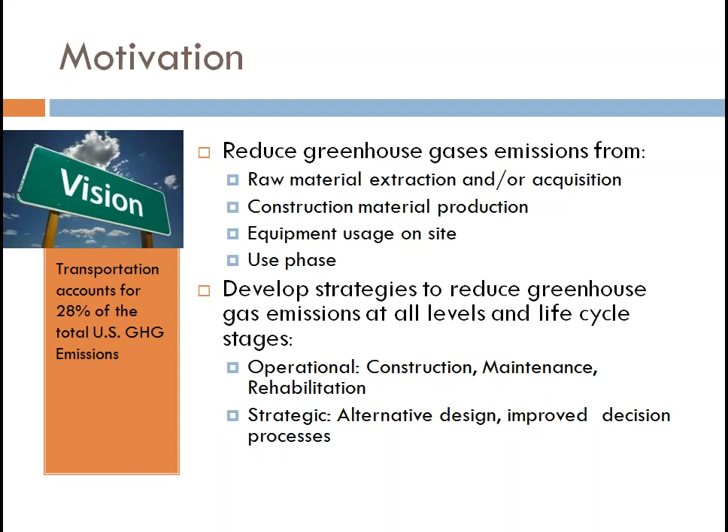One of the things I'll be talking about today is that building and maintaining smoother pavements is a good idea. Intuitively, that's because smoother pavements reduce fuel consumption. Personally, on your vehicle you may not notice a major difference, but given the entire fleet, the numbers add up very quickly.

Of course, there's the added benefit that it's a much more pleasant experience driving on a smoother pavement. So the question is, what do we know about pavement roughness and how does that relate to fuel consumption? And how do we tie that into some of our life cycle assessment work? So why smoother pavements?

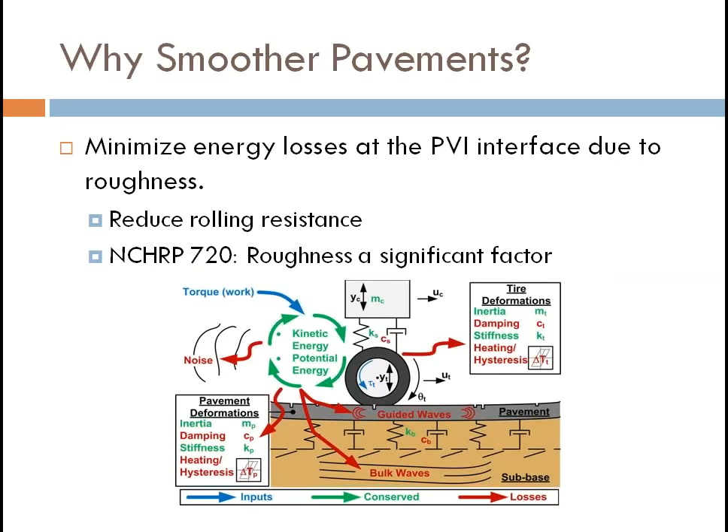We want to reduce rolling resistance. NCHRP 720, and quite a bit of work coming out of this university too, shows that roughness is definitely a significant factor. Pavement deflection and other areas where energy is lost at the pavement-vehicle interface exist too, but roughness is definitely one of the most significant factors.

Given that roughness is a significant factor, we use the IRI measure, the International Roughness Index, to measure roughness. Not all states use it, but most states are using it at this point, and Federal Highways is pushing for IRI to be used. It's measured in inches per mile or meters per kilometer.

One of the best parts of it is that it's generally an objective, measured quantity, and is reproducible. Now, I have to put in a caveat here: usually when I give a version of this talk, afterwards somebody says, I don't think you understand, we really don't know how to measure IRI. My response to that is, I hope you're working on it, because I don't care — what I'm working on is the stuff that you're producing.

So we tend to work with IRI data and draw our conclusions from it. If the IRI data isn't perfect, some of those imperfections will show up in our studies, and we recognize that as a limitation.

I think generally we know it's a reliable metric, partly because a lot of the IRI data is used to calibrate and validate various existing systems. So we don't look at it as an inherent absolute value, but more as an approximation for the pavement. There's the reality, and there are the trends, and the trends may reflect that reality, but we're not suggesting this is an exact measurement.

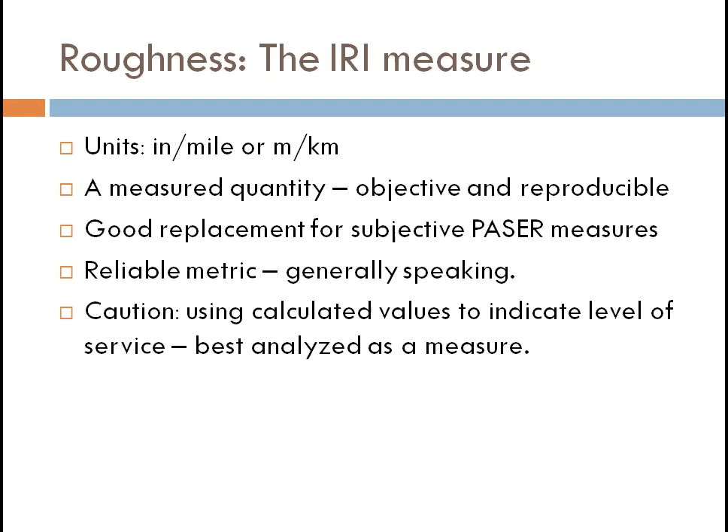When we're looking at greenhouse gas emissions during the use phase, it's a useful metric to estimate these emissions. In the context of use-phase emissions, we want to minimize pavement use-phase emissions, because we've seen in various studies, including some of our previous ones, that 88 to 90% of life cycle emissions happen during the use phase — that is, after a pavement has been commissioned, post-construction.

With respect to IRI, we know that a change of 2 meters per kilometer gives you a 1 to 2% reduction in fuel consumption. Again, strictly speaking, that's not a very big difference on your personal vehicle, but within the fleet, that translates into quite a significant difference.

So the challenge is how to estimate these use phase emissions, understanding that this is fundamentally a dynamic value we're looking at, because traffic changes over time, your pavement condition is deteriorating over time, and so we have to consider this as a time-dependent process.

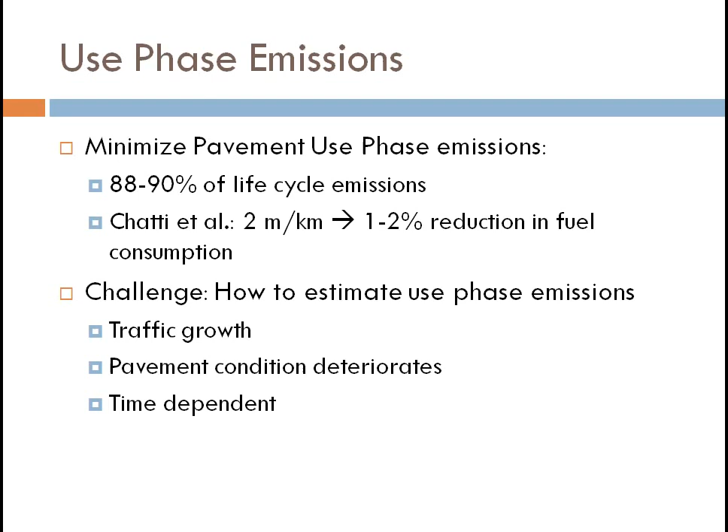Given that it's a time-dependent process, how do you associate and estimate these use phase emissions? The question really is, how does fuel consumption change over time as the pavement deteriorates? Not just how does fuel consumption change with IRI, but you have to look at that in the context of how it changes over time as the pavement is deteriorating.

What we wanted to do was first answer questions like: how does the IRI change over time? Because we use the IRI change over time as an approximation for pavement deterioration, which we're using to look at roughness. And also understand what conditions influence the IRI.

So are there relationships with pavement type? Are there certain trends we can see with pavement type? Regional factors - are we seeing these trends come up differently because of climatic differences? And traffic loading - what are the factors driving the relationship of IRI change over time?

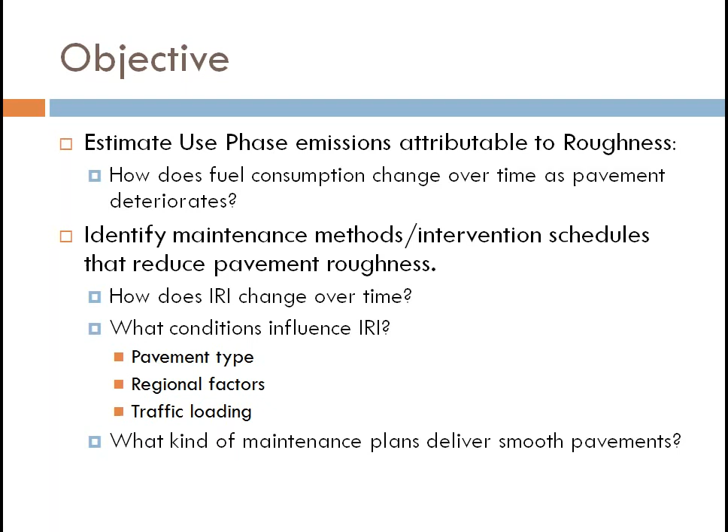And also, strictly speaking, based on the empirical data, what kind of maintenance plans help us deliver smoother pavements? So the fundamental question we're looking at is how does fuel consumption change over time?

We can write that as a simple differential rate of change of fuel consumption over time, and we can reduce that down to this simple product, which is the rate of change of fuel consumption as a function of roughness, multiplied by the rate of change of roughness over time.

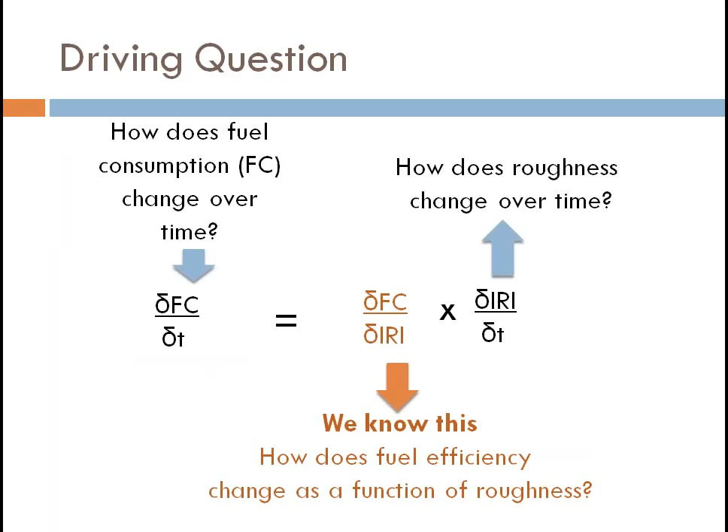When you do that, we find that the first part of the problem we have a good handle on, because we understand how fuel consumption changes with respect to IRI. How do we know that? This is out of Dr. Karim Chatti's work at Michigan State.

And of course, this also plays out for different speeds, which, as we know, the different speeds do make a difference. That's the basic assumption I should have mentioned earlier.

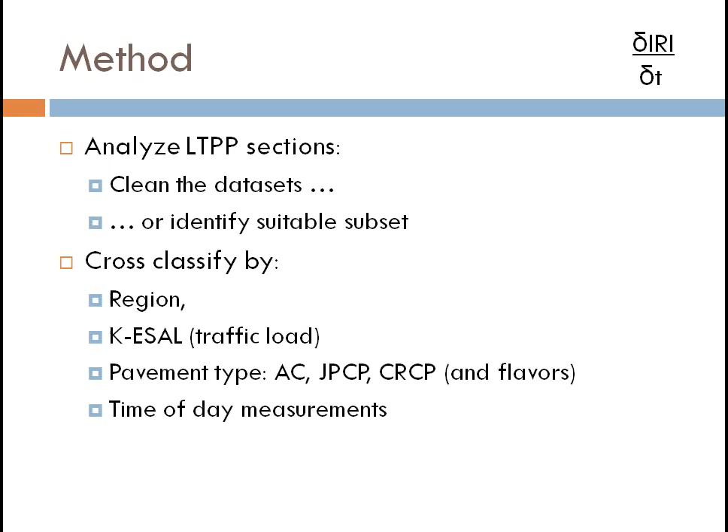So we said, why don't we start off with a data set that's already been used for some purpose, assume the validity of that data set, and build from there. We started off looking at what we call the pre-validated data set, the IRI data set that was used to calibrate the MEPDG IRI change models. We figured if that's been used, there's definitely some validity to it, so let's start off with that, and then see what differences we get as we apply the same test to the larger body of data. So we started working with that data set, subset.

Part of the reason is that for that particular subset, the model IRI calculations closely correlated with the observed IRI calculations from the LTPP database. This was a subset where, as I mentioned previously, there were concerns about the reliability of the IRI measure - but this was a fairly reliable data set to work with. And all results that I'll be reporting are at a 95% level of confidence for hypothesis testing.

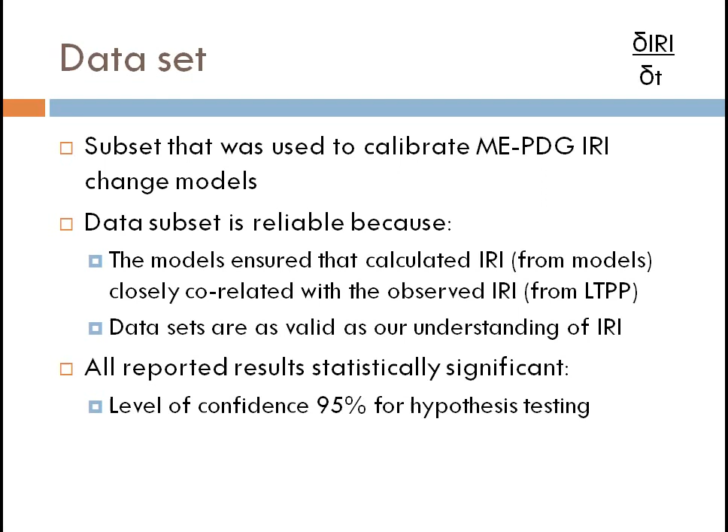Some of the complicating factors, as I was mentioning earlier, is that the LTPP data set spans about 20 years, early 90s data sets from then. So there are some sections that are very well documented in terms of the maintenance that has happened, and other sections that are not as well documented, probably because they rolled into the program at some point later on, or fell off the program at some point. For some reason or another, there are places where you clearly see changes in IRI with no maintenance or construction having been done. So we had to go through a cleaning process to take some of those sections out.

The other concern is that the LTPP database has all these different studies, and each study's pavements were done for various different reasons. The reason the sections are in the database was often to measure other issues, but the IRI was also measured for it. That is a concern, but as I mentioned earlier, if the IRI was measured, well, the IRI was measured, and IRI is IRI. So there might be some confounding factors because there might have been special case sections put in.

The response to that is that, generally speaking, we're not suggesting you take this as gospel truth, but look at it as, given a large data set, what can we do with it? Then take the conversation to the next step: what other large data sets do we have with this kind of infrastructure data that we can start filling in and use the same approach?

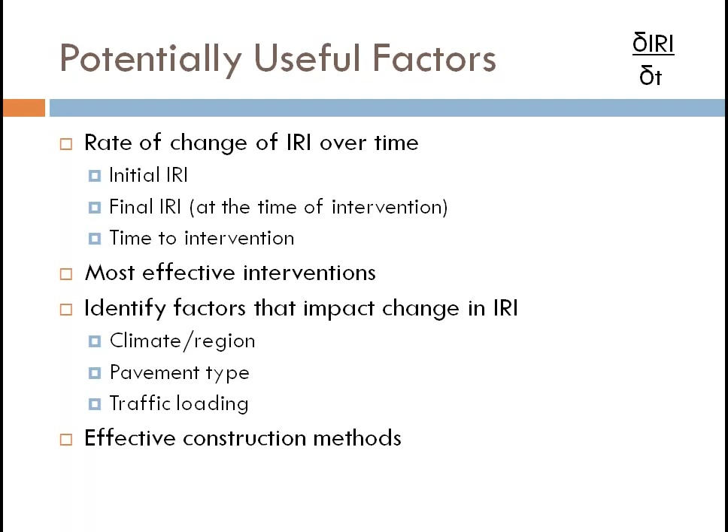Using those three numbers, we thought we could identify the factors that affect the change of IRI over time - looking at initial IRI, time to first intervention, and the IRI at the point of intervention. So the question was, let's look at region, climate, pavement type, traffic loading, throw all these numbers out there and see what we get.

As I pointed out, this is a fairly noisy database. So what we were looking for is whether there are any trends that come through irrespective of the data subset we're using to analyze, or the question we're asking of the data. The one general trend that came through across all the different subsets and questions is that asphalt, the AC pavements, tend to have a lower initial IRI, but a faster degradation rate.

If you look by region, we're seeing a similar pattern in pretty much every region. There are parts of North Central where it goes the other way, but those sections we later traced back to having very specific problems. Generally speaking, from that you could also understand what the first intervention years were. Typically in the southern region, and interestingly also north central, you're going between 15 to 16 years, whereas in the North Atlantic and western region, you're looking at 10.8 to 11.8 years.

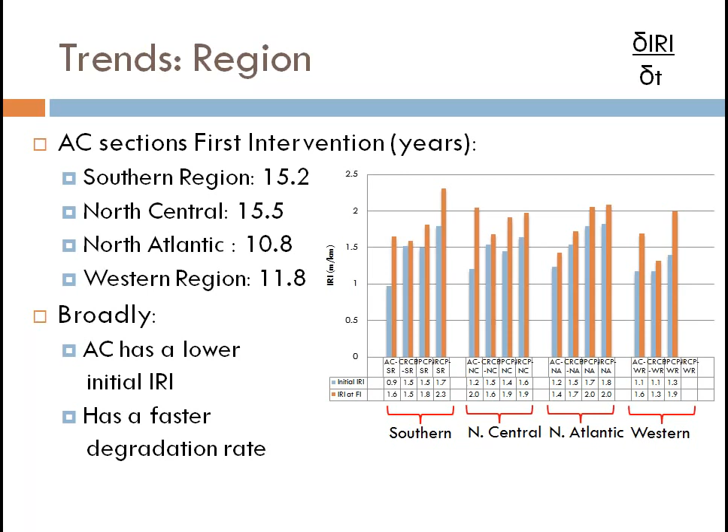We also flipped it and looked at freeze-thaw behavior, and found that wet freeze, dry freeze, and completely dry regions fall out pretty well along those same numbers - generally between 15 to 16 years in some regions and between 10 and 11 in others. Then looking at trends by base type, with asphalt pavements you're seeing a lower initial IRI for treated bases than for untreated bases, and this is not unexpected.

Concrete pavements, even though we hear that DOTs are looking at using more stabilized bases, we're finding that in terms of the data we have, we didn't find any major sensitivity there.

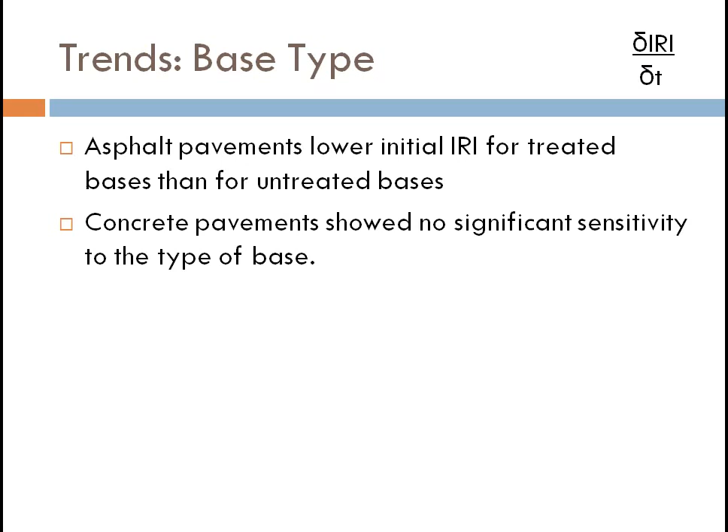Effective interventions we looked at, of course, and some of these are expected - you're finding major reductions in IRI between 20 to 30% for joint repairs, slab replacement, surface grinding, and different kinds of surface treatments. They reduce your IRI by 20 to 40%.

Now, what are the sequences that work best? Again, we're getting into a situation where the data is not probably the best to answer that question, right?

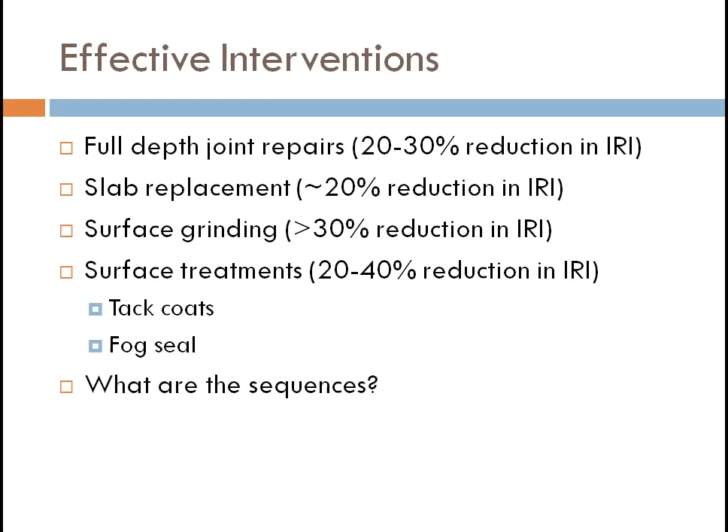So the general lessons from analysis, when you look at it through the many different subsets that we analyze - and I'm not getting into all the details here - is that the one common signal that comes across is, generally speaking, the asphalt pavements tend to have a lower initial IRI, but in the long run their rate of change is steeper than for concrete pavements.

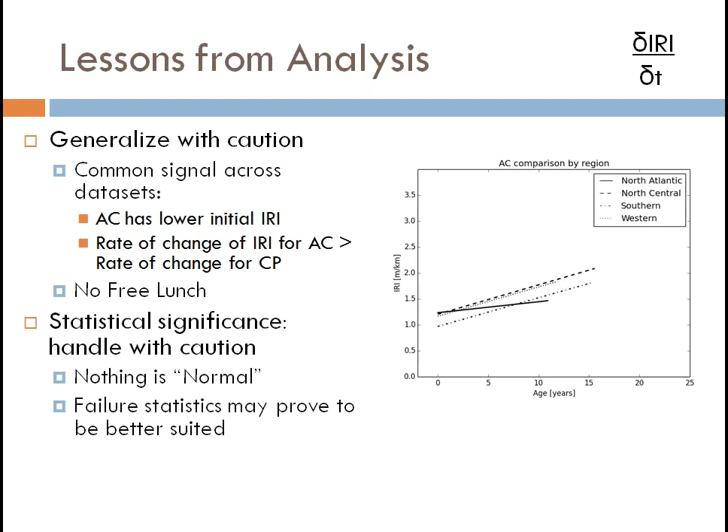But this general slope between the AC and the jointed plain, you're finding those slopes coming out to be pretty consistent, and despite the noisiness of the data, it doesn't matter which subset you're using, you're finding that trend coming quite clearly.

So going back to the PVI question, based on these trends, we can do an IRI over time curve. So IRI as a function of time, given that at t equals t naught, you have the initial IRI and the rate of change of IRI, k.

And that rate of change actually turned out to be quite linear. We were wondering if linear models would be good, but based on the data, the linear models were not a bad fit.

So if you combine those two, now you have a relationship for fuel consumption over time. Using Chatti's work with fuel consumption over IRI and multiplying it by the relationships we got with IRI over time, we could now start looking at fuel consumption change over time.

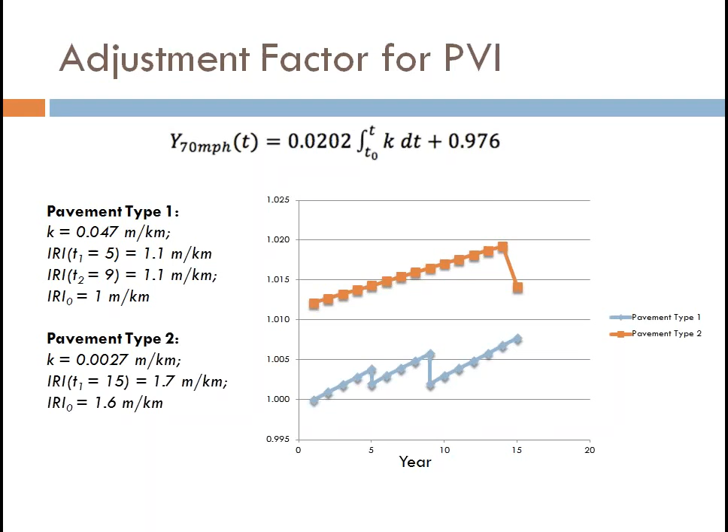So on the y-axis you have the fuel consumption percentage change, and on the x-axis you have time. The idea is that when you're looking at fuel consumption with respect to time, you're looking at that curve rather than just the specific factor.

Now, of course, one of the things you learn from the data is that because of the wide variety in data, even though we're seeing this one trend about the rate of change of IRI, it would probably not be a good idea - or we should be very careful on how we generalize some of these trends across large databases, as well as how we convert that into practice and say this is how we should be looking at pavement type selection.

So the idea is how do you take the data that we have for a given network and consider network-based approaches that help decision makers answer similar questions using similar underlying methods, using their own data to be able to make decisions.

So what we did was we started off building this with the LTPP data again because it provides us a nice system to work with. But right now we're in the process of integrating other data sets for IRI, especially data sets that were actually measured with IRI and IRI-based actions in mind.

And so the goal is to create transparency for these data sets and allow customized assessment by the stakeholders. So if you're a DOT administrator, decision maker, and you're looking at prioritizing your pavement maintenance, smoothness typically is part of that decision.

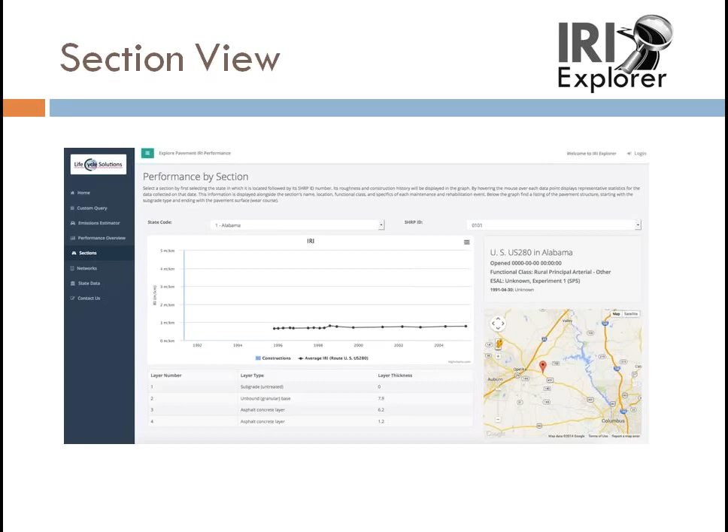This particular screen uses the LTPP data. You can choose a state, select a section, and then look at your IRI history for that particular section, and also the map location of where it's located.

So you also have the design and construction history. Now, what happens is that some sections actually have a very good design and construction history, and it's very useful to understand what happened with that pavement, why the IRI changed the way it did. And there are other sections where you don't have a lot of data.

And same thing, you can build your customized network, understand what the pavement types were, and start looking at the map location of where they're located. And this section connects back to the previous page, so you can go do a more in-depth analysis and understanding of the history of that section.

So the context-specific subsets, I think, are the most useful aspect. And again, this goes back to the question of access: when we have these large data sets, are our decision makers capable of accessing this data and being able to use it for their decision-making purposes?

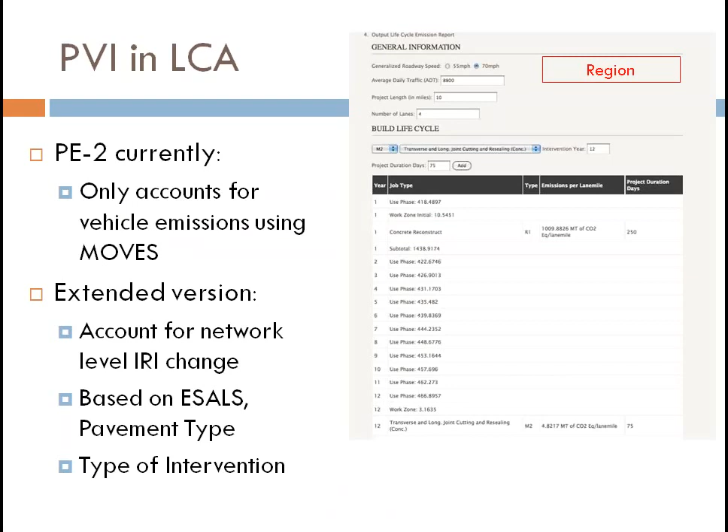Now, in a previous study, we had developed an emission estimator using the MOVES platform, which is an EPA emission estimator, to calculate the use phase emissions. That was based on region, traffic load, and speed, and essentially we'd come up with the yearly use phase emissions based on the MOVES estimator. Based on the first year, we'd multiply it by traffic growth in successive years to look at the use phase emissions due to traffic between two operations.

So the extended version is to account for network level IRI change, and also account for traffic as well as pavement type and the type of intervention, and tie that in.

So there's going to be a jump because of the intervention itself, and that's actually a sum of the jump because of the intervention—since you have emissions associated with maintenance—and from that you subtract whatever you save because you've reduced the IRI. So the slopes change a little bit after that. Essentially it does an integrated use phase emission estimation.

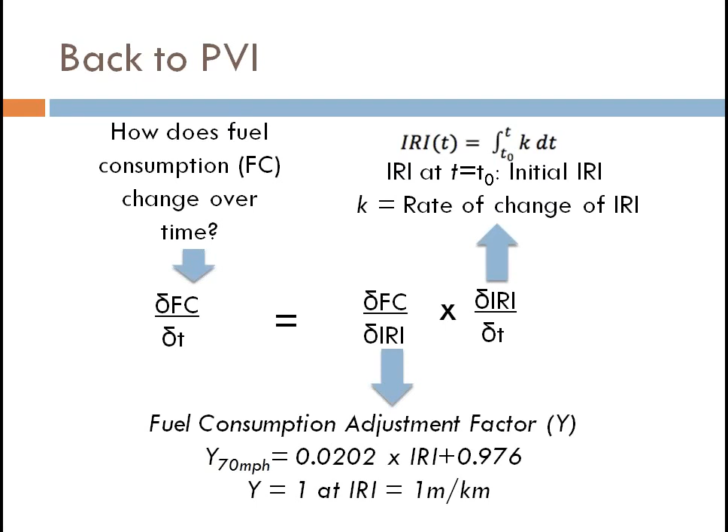So the first part of that fraction, let's go one more slide back—the rate of change of fuel consumption with respect to IRI, that is dependent on this table.

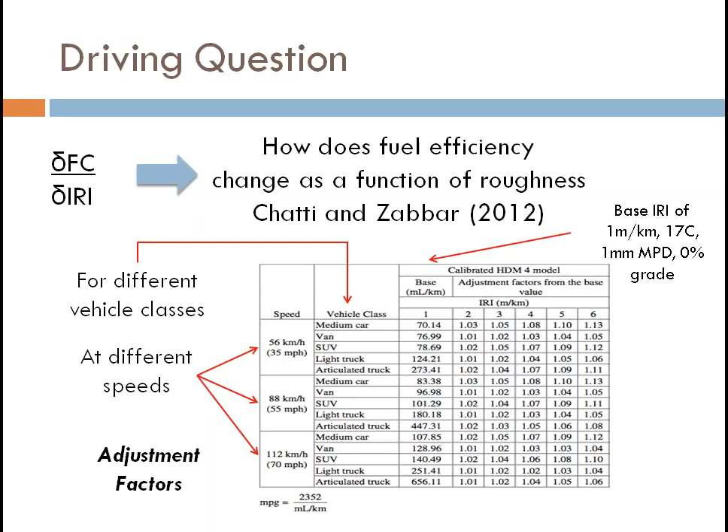In this table you get three different speeds: 56 kilometers per hour, 88, and 112, or 35, 55, and 70 miles per hour. The equation we have is based on the 70 miles per hour numbers. Those are the three speeds we use, and I think the software right now is just doing 70 and 55.

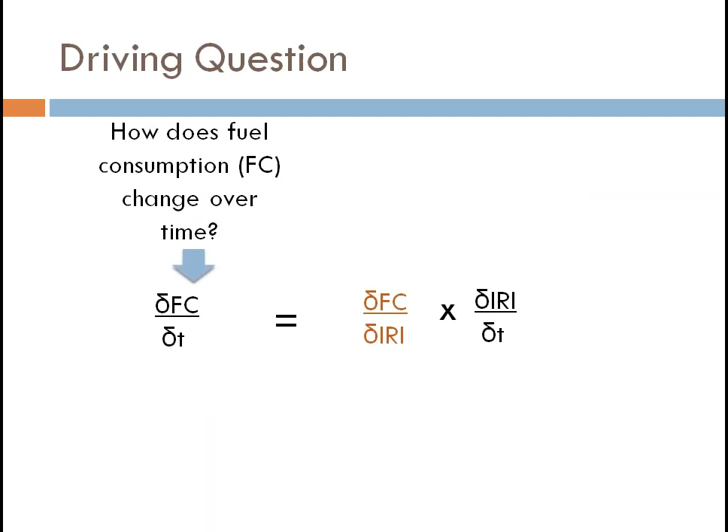So speed is not an input for you? Speed is a choice, not an input—you get to choose between 70 and 55. What I've shown is the equation that follows from the 70 mile per hour part of that table, but you could come up with a similar equation for 55 mile per hour as well.

So the speed-IRI relationship should be the same then, if you're using this—since you use only three speeds as mentioned in the table. Right, but MOVES can consider different, more speeds. So correct, it's like combining those two and developing some relationship.

There's also something related to the VSP model with the specific power model, and related to that IRI—we generated and set up equations, and the trend is absolutely the same. So it should be a more detailed version of this equation. Correct. Strictly speaking, we should be able to take that and stick it in here as well, as a change in the underlying relationship.

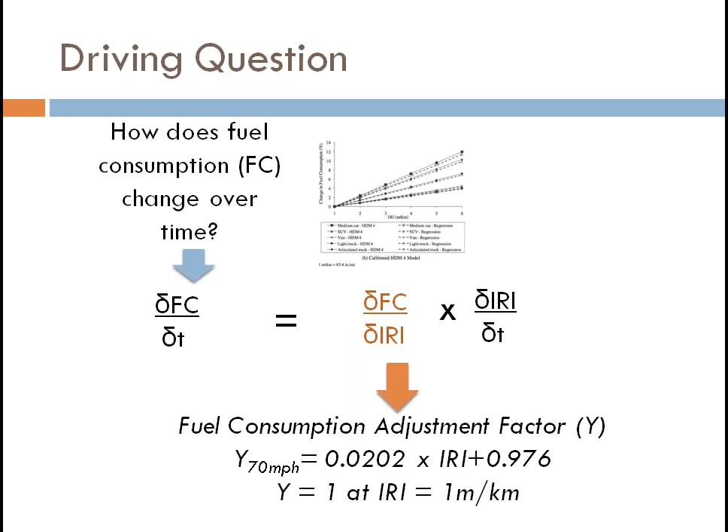Speaking of uncertainty, have you ever considered including your uncertainty stuff in this IRI prediction models too? Yeah, so when you look at the output that comes out, you get uncertainty ranges on all the values—in this case we provide uncertainty ranges on pretty much all different values.

The text is a little small, but it comes in with the ranges of variations, so it's not just one number. The problem when you're working with decision makers is that when it comes to making a decision, how we deal with uncertainty—even when uncertainty is provided—is tricky. But we do provide that. Yes.

With the work with the Minnesota data, we've gotten some very interesting distributions. If you go back to the paper, it actually goes more into depth on what those specific individual distributions are. I can show it to you if you want afterwards, but we don't talk about those in our presentation.

One thing I didn't pick up is what is the range for the IRI you are using here? So most of the LTPP data goes up to 3 meters per kilometer. One meter per kilometer is roughly 60 to 66 inches per mile. So that's the range. Beyond that, there are very few pavements that are higher than 3. At 3, you're at pretty rough pavement.

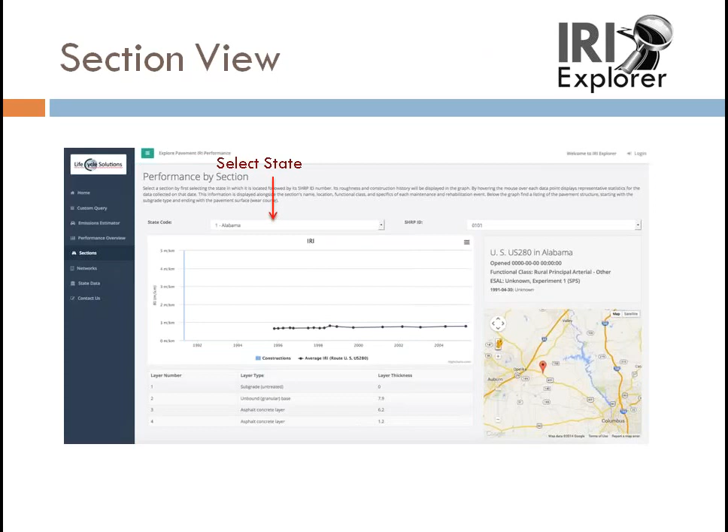We did not, because the data is questionable. Well, if you look at this, it goes back to this section right here — the design and construction history — and it's very spotty.

Part of this effort is also to actually have people — if you have data, please provide it. I've had this discussion with Dr. Al-Qadi, with Illinois too. If you have data, I think there's a case for warehousing it, because that allows us to ask exactly these questions.

I had a question about the application of this. At the end you talked about building an LCA. So is that for users to be able to look at historical cases, or to predict or look at returns?

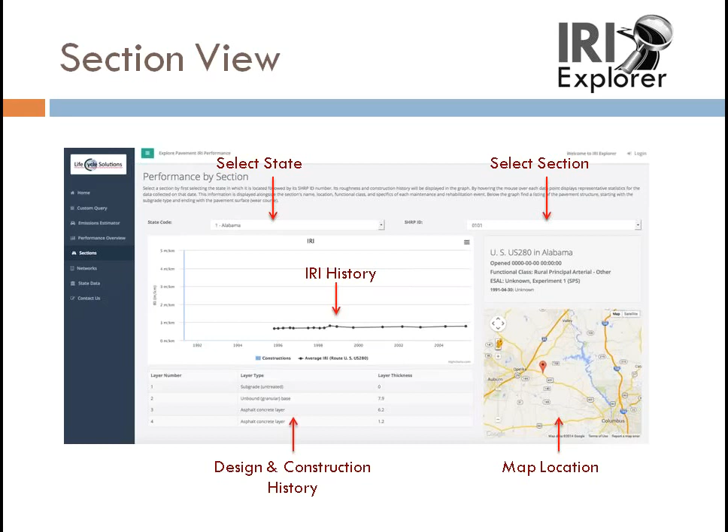So you should be able to do that — if you have your own data, you should be able to use it as a way of analyzing historic cases. But also, you can start off with it and actually build your own.

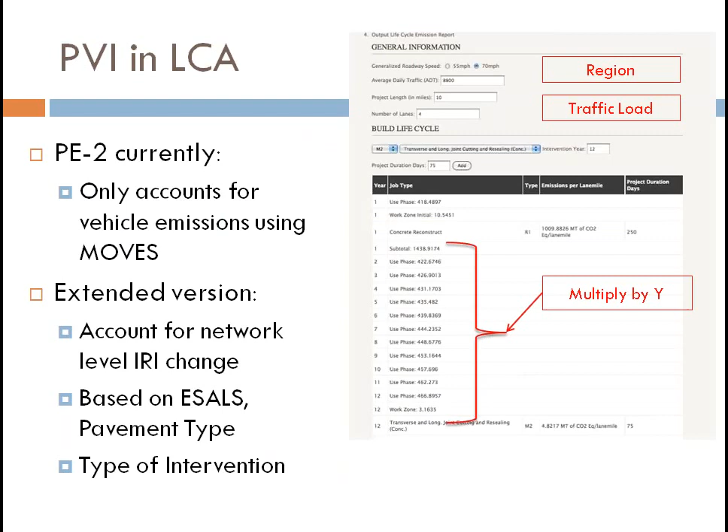So you can build your own treatment schedule basically, and play with alternative treatments. And what it does in that case is give you an estimate.